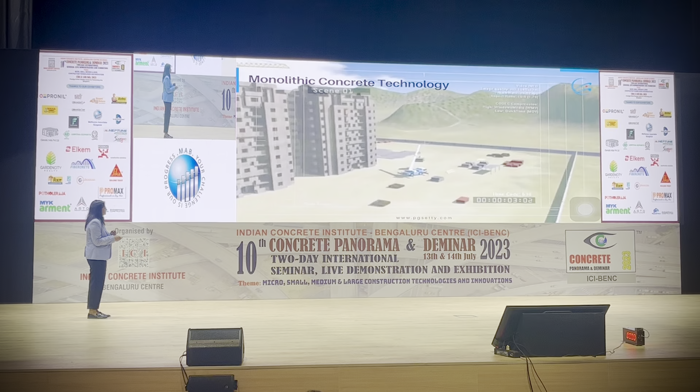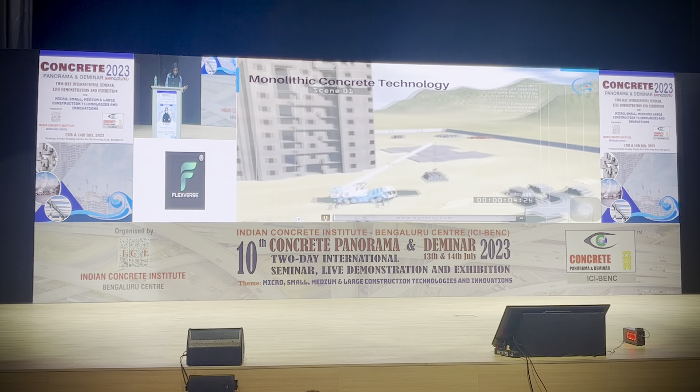So you can do a raft or strip footing, and as soon as that is done, at each floor you lay down your welded mesh or rebar, and then you start fixing your formwork. These are the tie rods which hold the formwork together. This is an aluminium formwork system, which is a self-leveling, self-aligning system - I'm sure you've probably seen it abundantly in Bangalore skylines today.

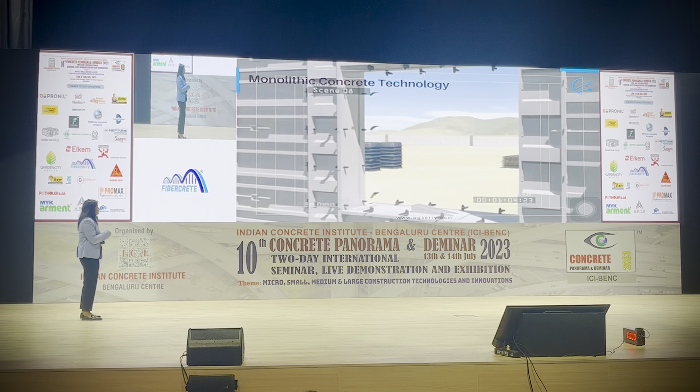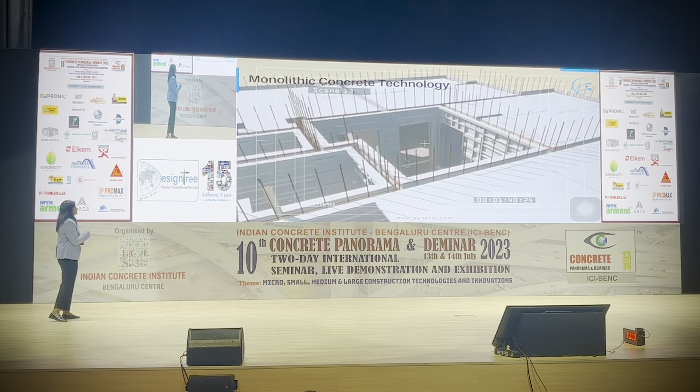All your openings, including doors and windows, will be cut out and left, and the openings will be made. Then ties are added for your openings so they don't bulge when you concrete, and the slabs and everything will start to be laid down. We usually use a boom placer, and the entire structure - your walls, beams, chajjas, parapets, whatever element is in the structure - will be concreted completely in one go.

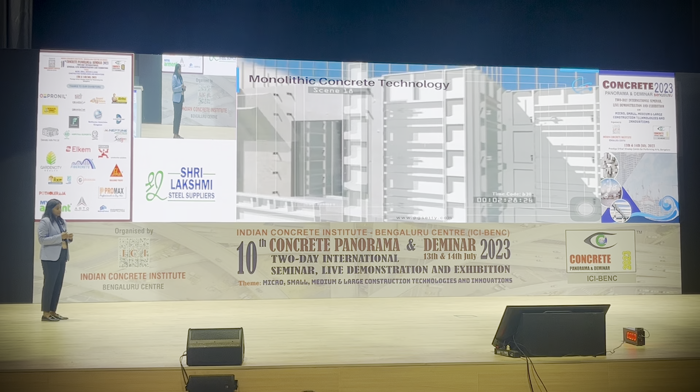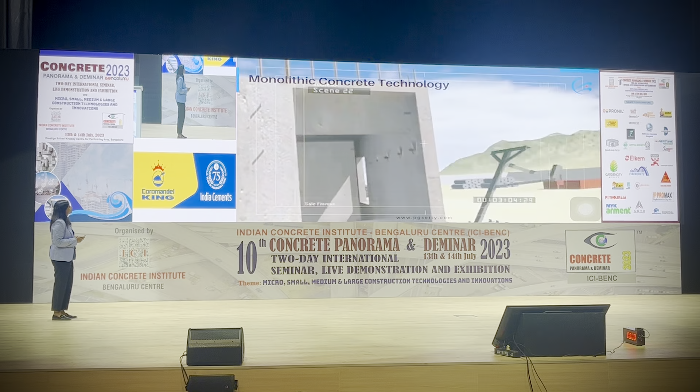This is done with self-compacting concrete. Within 12 hours we also de-shutter the walls, and the slabs probably in around 16 to 20 hours, with central support in place of course. Then all the tie rods are removed, and we prepare the platform to ensure complete safety of the people working on the next floor ahead. Those black ones are the tie rods which hold your system together when you concrete, to keep it in place.

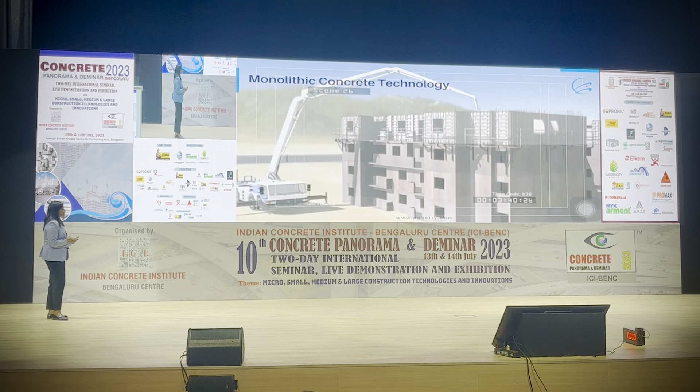We were the first to introduce this to the government agency and show them that the entire house, including wall, slab and all the elements, could be cast in one go. Until then everyone was casting the wall separately and then the slab and then probably the other elements. So we were the first to do a single pour for the entire structure.

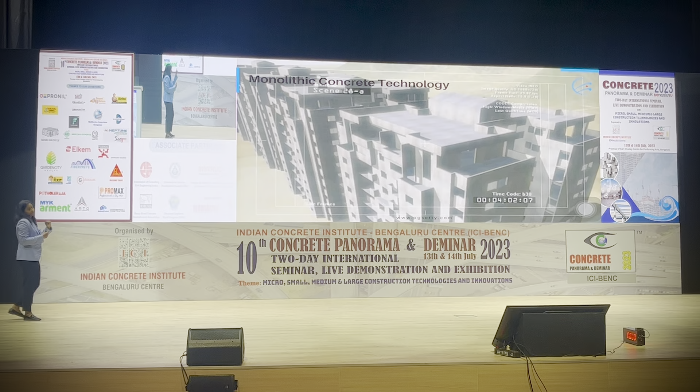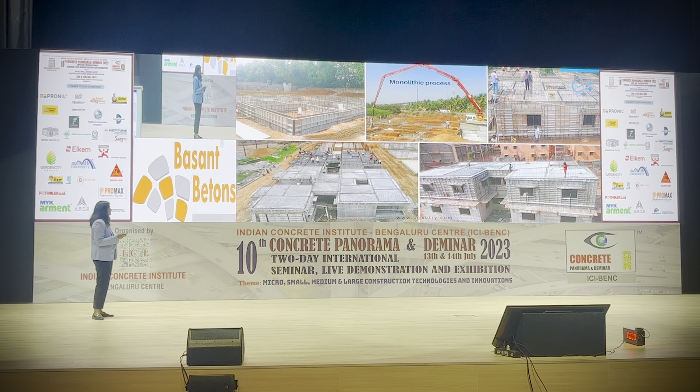So this is our initial days where a lot of mass housing was done, nearly 3,000 houses for different government agencies, including the foundations done in a monolithic strip wall footing system using aluminium formwork. You can see we have a row of houses, every floor plate around 2,000 square foot of 4 houses, and each plate of 4 houses was being concreted every 48 hours. That is the kind of speed we could achieve in this project, way back in 2011-12.

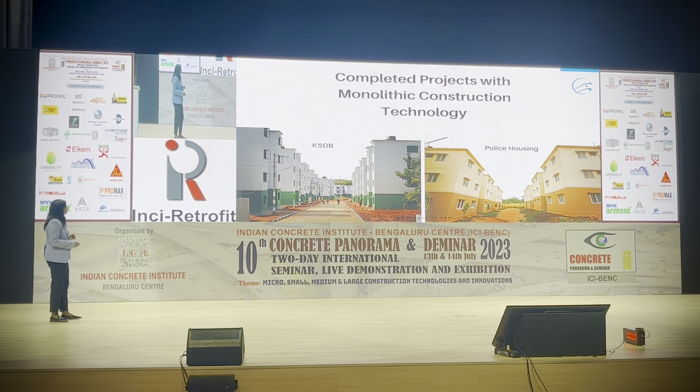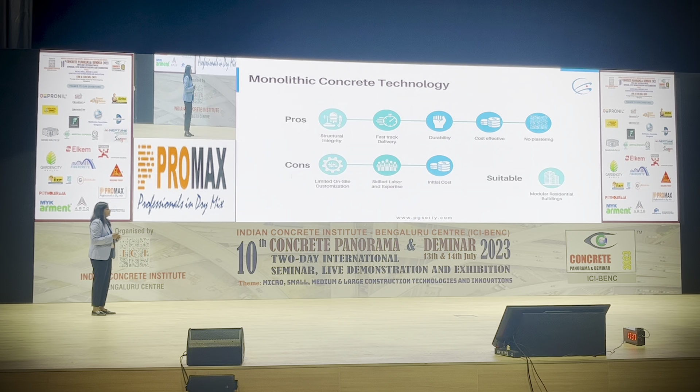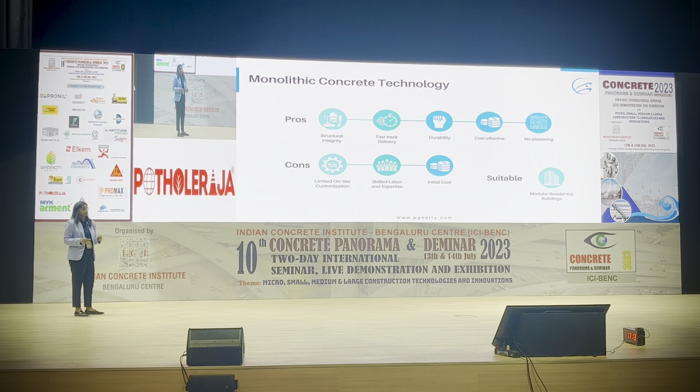We've heard enough advantages of technologies, especially precast and monolithic in some way. The only difference between monolithic and precast is that the entire unit is cast at site with self-compacting concrete, whereas in precast it's completely manufactured at factory and assembled at site. So of course your time and cost are effective, and plastering, the most time-consuming activity which involves a lot of wastage in construction, is completely avoided.

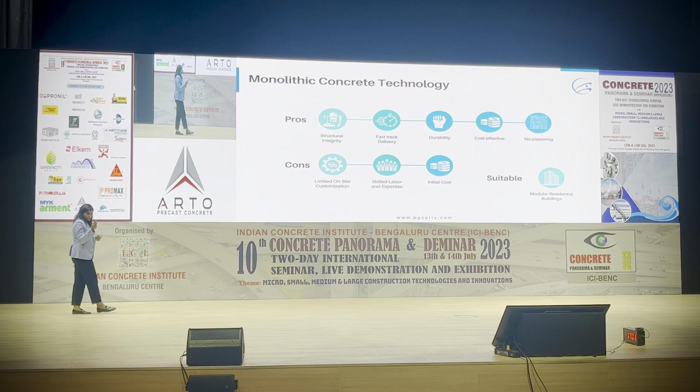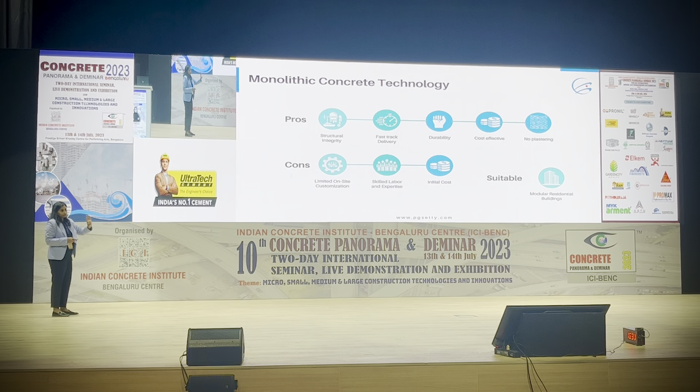With every technology there are some limitations we need to work with, and if you're able to choose the right technology for the right project, you should be able to overcome these cons. There is some limited on-site customization possible, but if you design it well ahead, those things can be thought of. Monolithic especially needs a little bit of skilled labor which we need to train, and initial cost compared to conventional construction would be a little high. This technology is mostly suitable for shear wall structures, usually in modular residential buildings.

Like I said, we were the first to demonstrate for a slum board in 2010, where we could cast the entire structure in one go, and we were also given the Ministry of Housing's most cost-effective housing technology award.

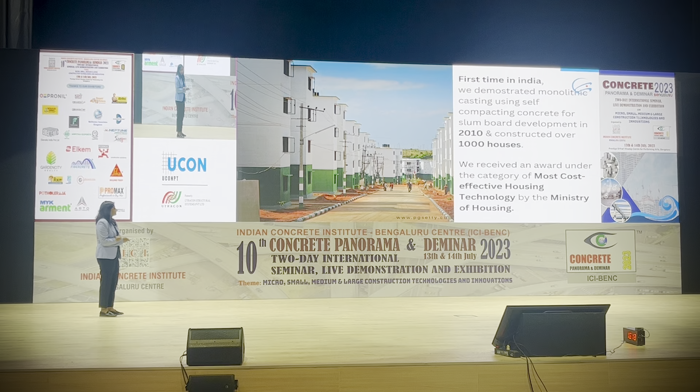So that was one of the technologies that we worked with for nearly 7-8 years, and since 2014 we have also been working on precast. With monolithic, yes, we were good. We were able to match the price after a couple of projects, and we were able to get the speed of the project too, but still we had to deal with transporting concrete, because concrete is a very time-sensitive material, as we all know. We have a time gap by which we have to pour it and put it in the final shape.

The more remote the place, the more problems were cropping up, ensuring the weather doesn't affect production and that I consistently get what I got in the first pour. The surface finish was becoming a little difficult the further out we went, and the more the distance from where the concrete was produced increased. So when we started exploring what other technology we could move to, that's when we got onto precast, studied it, and started using it.

I'll also run a video for you so that you understand the process that we follow.

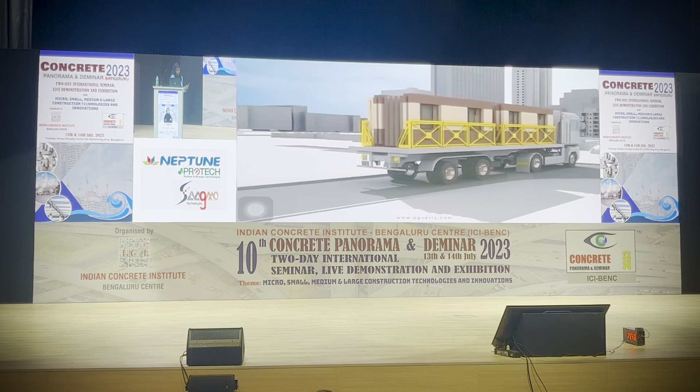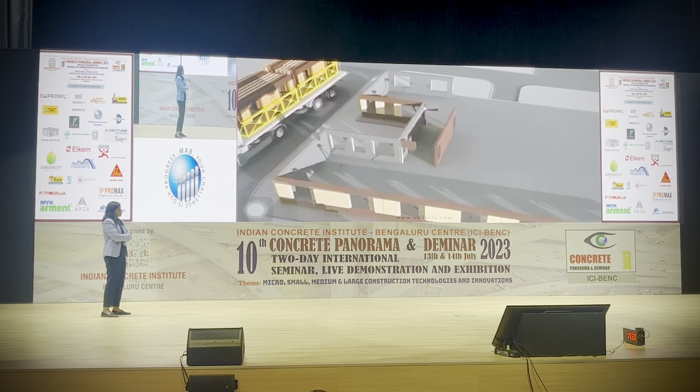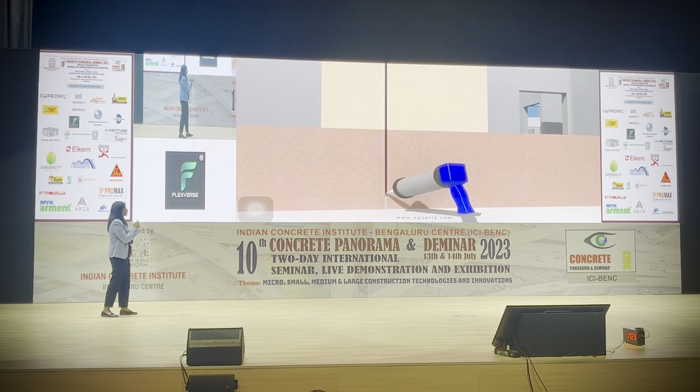So yes, in precast, like I said, all your elements will be manufactured in a factory, transported to site, and then erected. This needs heavy machinery, of course, when you have the volume and speed that you need, and the speed in precast is definitely better than even monolithic construction. These are wall panels being joined, then slab, and all the joints, which I'll show you ahead, will be grouted.

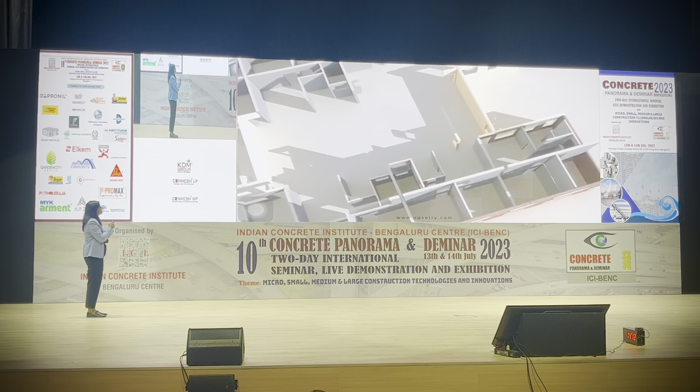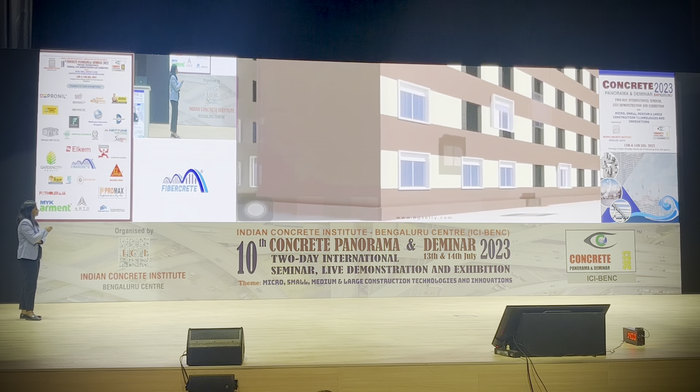As soon as the ground floor is completed, you can immediately start painting and fixing all your openings and joineries. This is one of the projects we did in Mysore recently for Tata Motors, which was not a housing project but a commercial project, completed in 60 days.

This is a setup of the casting yard, where we pour all our precast panels, 2D cast on a plane and then finished. From day 1 when we started production, by day 10 we were already through with ours. Simultaneously, when your foundation is started at the site, your factory activities will also be running. That's where we save time.

These panels are being transported to site, with all the wall panels transported vertically on an A-frame. All kinds of elements, including your frame structure, can also be precast. This structure especially had shear wall, solid precast slab, column beams, and cantilevered slabs.

By day 20, we were already through with the ground floor.

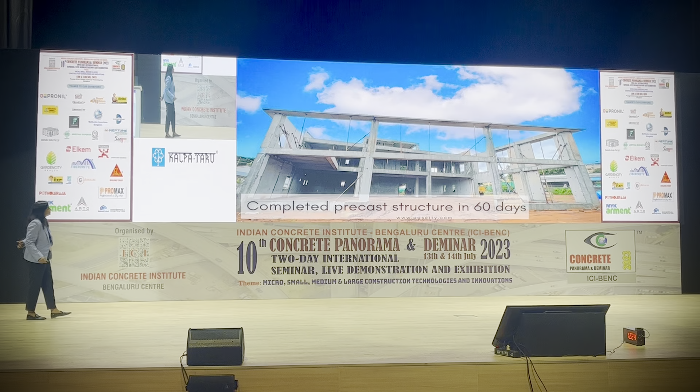So this is the bare shell, which had a combination of frame structure and shear walls.

They took some time for finishes, and this is the end product. This is without plastering, the surface as it is. We also got the Outstanding Commercial Structure Award for this project.

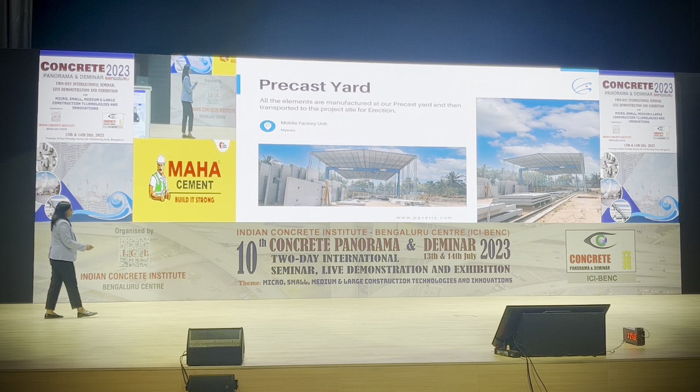So this is a typical stockyard and casting yard that we have, and this is also a mobile, completely knocked-down stocking and casting yard. If there's enough volume, this entire setup can be shifted to any site, let's say 500 to 1,000 houses, if the land is also available. It can be completely shifted and manufactured there, so we bring down the cost of transportation altogether for bigger projects.

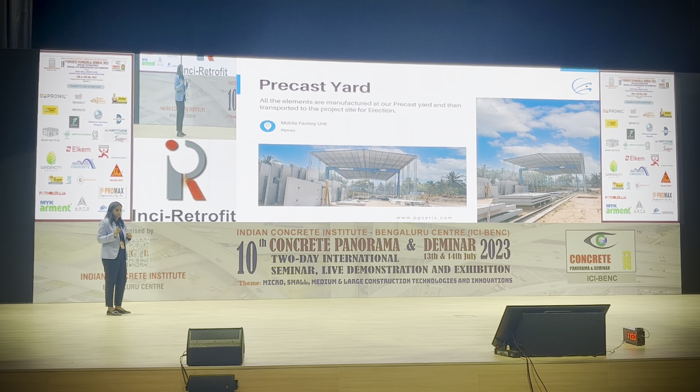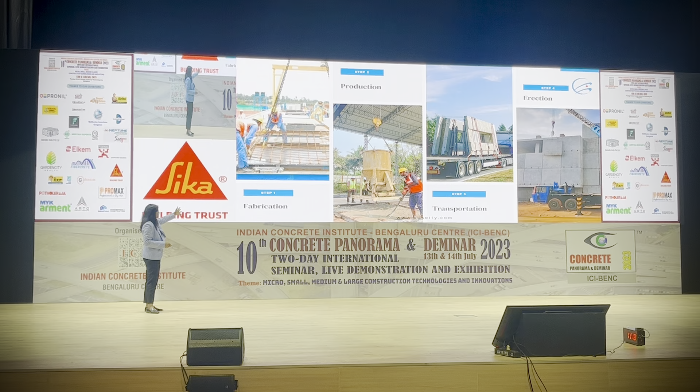So this is a typical stack yard that you see. Like we saw in the video, this is where the start of the work happens, where we lay down your formwork and rebar, and then you start concreting. That's an A-frame trailer I was talking about, where you mount all your vertical panels, your walls basically, which will be transported on an A-frame and then erected at site using a crane.

So typical mold and all the embedments in the mold you can see here. The complete reinforcement, including all your services, plumbing, electrical, whatever embedments need to go into the concrete as per the consultants, will always be embedded and then concreted.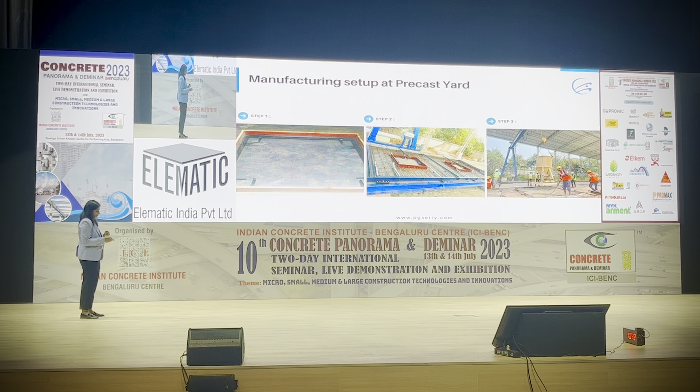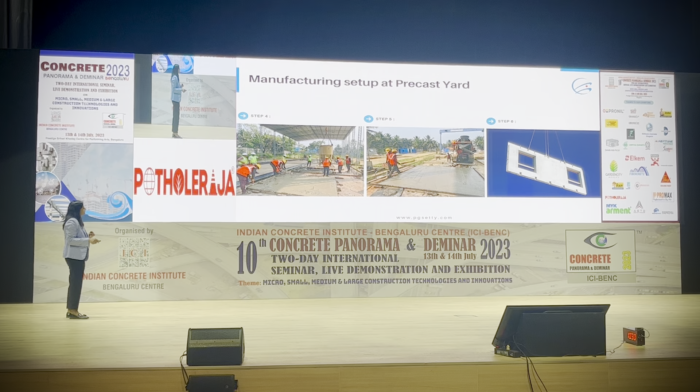Also, you can see those aluminum tubes, those are the grouting tubes which form the connections from every wall from floor to floor. And then we concrete and finish the panel.

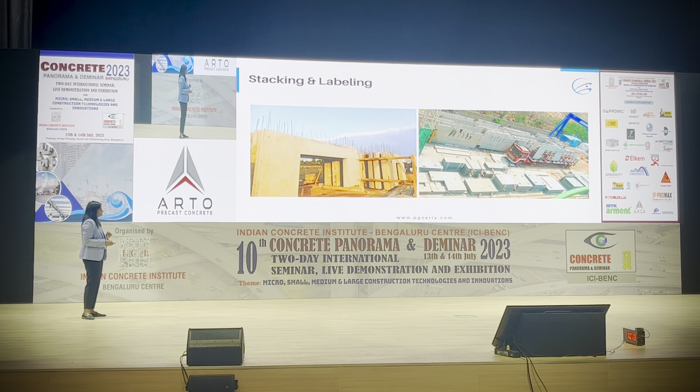This is a typical stack yard. As you can see, the walls and slabs are always transported vertically or horizontally. Every element will be labeled so that in a drawing it goes to the corresponding location that has been designated to it. So this is a stilt-level car park, which is also done in the shear wall system itself.

After you place your entire walls, you can see here this is the foundation from which all your dowel bars are jutting out, at least a meter. These are the dowel bars which form the connection to these walls, which will be grouted later.

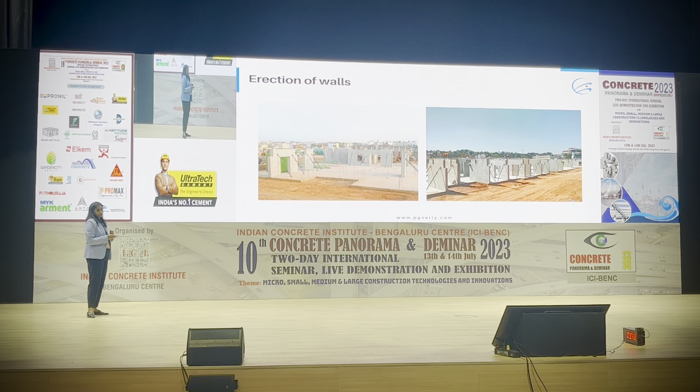Once the slab walls are erected, we have our precast slab which will be erected after that. Precast slabs can be done in many ways: one is the half precast slab system, full precast, and of course the hollow core system that we understood shortly.

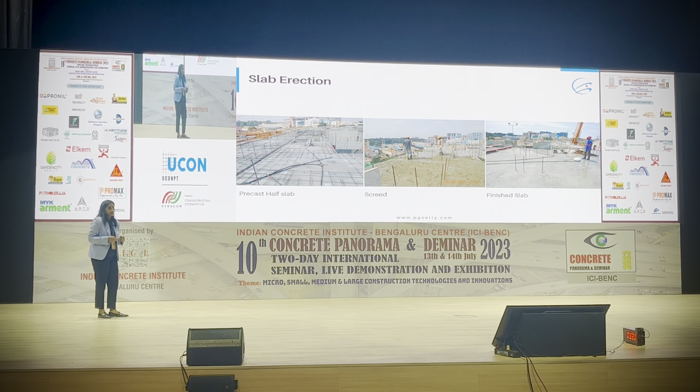So here what we have tried is a half slab system, where half the thickness of the slab will be precast and erected, and all your electrical conduits and top reinforcement will be laid, and then the screeding is done. This was also to ensure, for the Indian scenario, that you do not have a horizontal joint in the entire slab, every slab, and you completely seal with the proper finished screed at site.

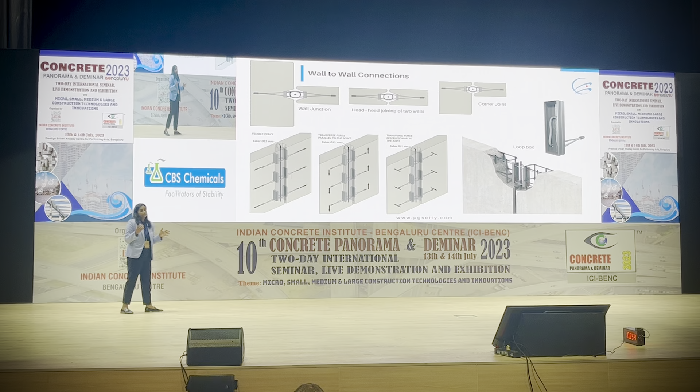So this is a typical wall-to-wall joint that we do. These are called loop boxes. Basically, in 2D precast panels, the different elements come together and get joined, and these joints are designed so that the structure starts behaving monolithically.

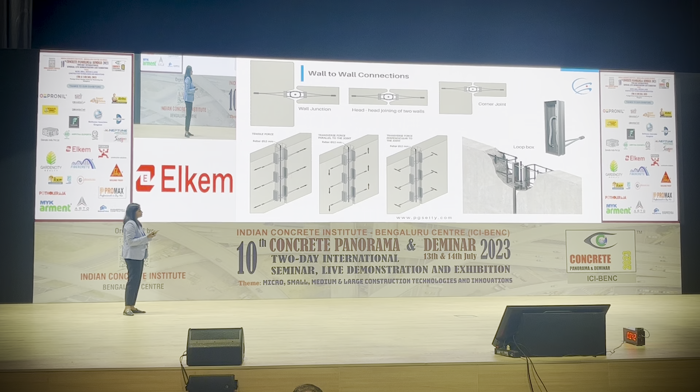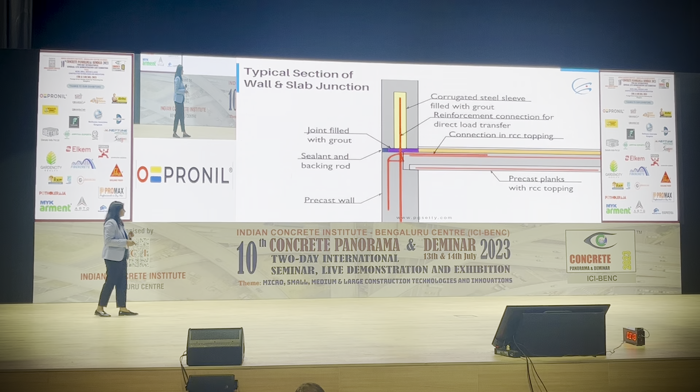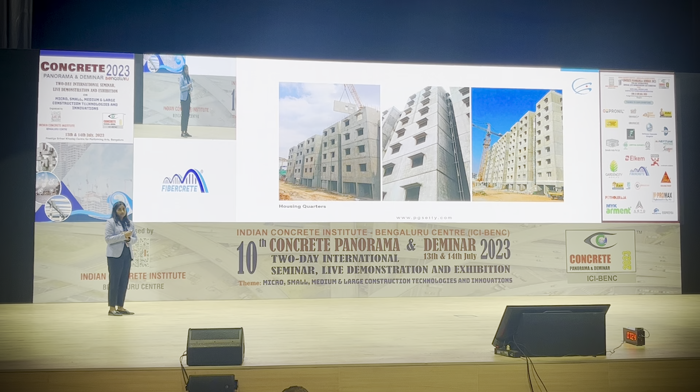And also this is another interesting project we did in collaboration with an Australian company. We started way back in 2012. And here, this was a mix of 2D and 3D precasting. This was done in Bangalore, near Alur for BDA. So here, all the panel elements were casted 2D, like a regular, plane system.

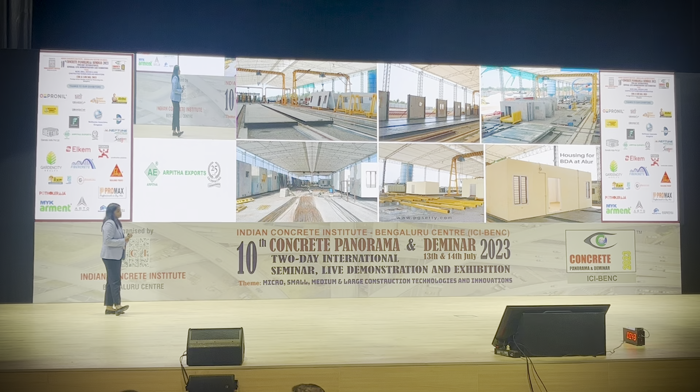And then at the factory itself, they were all fixed to form a cube, completely finished, including your tiling, your windows, your doors, your plumbing fittings, your electrical fittings, your painting, everything finished, each cube. And then transported to site, and then erected at site. All the finish is done, all ready. The only thing left at the site is the welded connections which they had planned for this, for cube to cube to be joined, and the connections of your plumbing and electricals which have to be run through between each units.

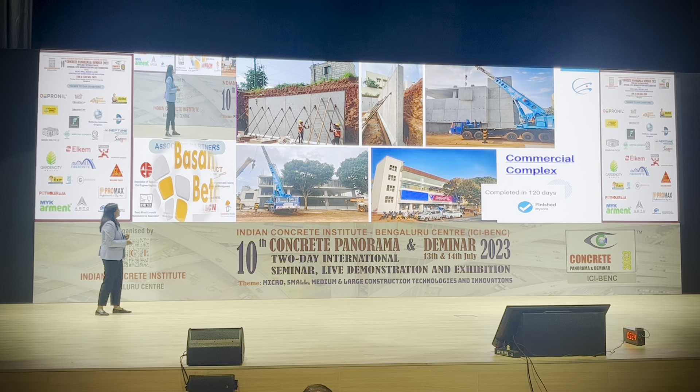So we completely did their retaining wall in 2 days because they had continuous ingress of water, which they were facing quite a lot of problem with. And of course, all the facade walls, like you can see on the other end, and even the lift, the staircase core and the staircases were all precasted.

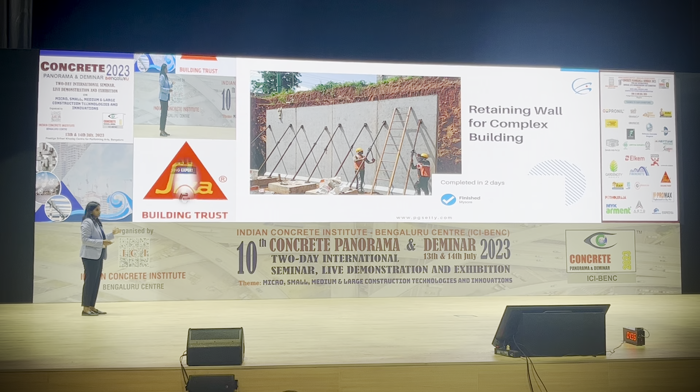So this is a retaining wall that we designed, and in this retaining wall, the only surface we treated, we put a waterproofing, was for the joints, only the joints of the precast. We didn't have to do the waterproofing for the entire surface on the other side. And these, till today, it's been at least last, I think, 7-8 months, have not seen any dampness.

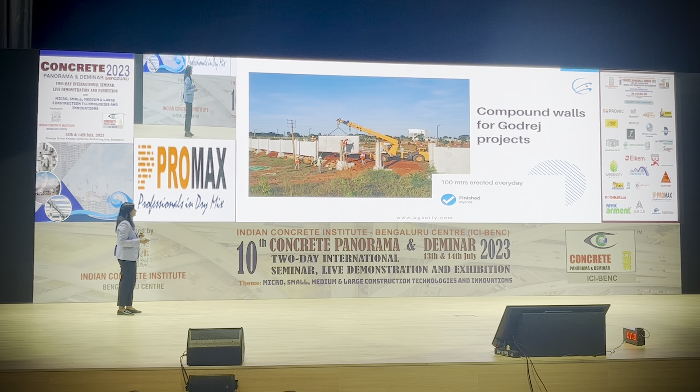These are facade walls, which will be hanged on to your main structure and bolted. So these are single 5-meter element compound walls that we did for Godrej projects in Bangalore. So we were able to do 100 meters every day.

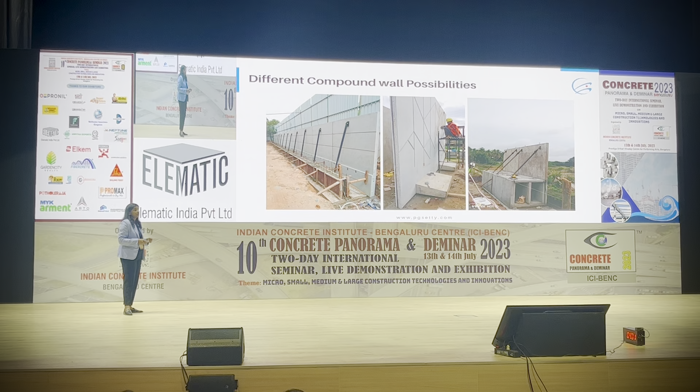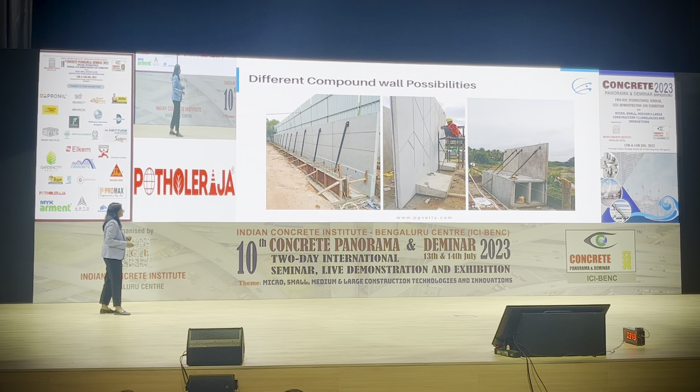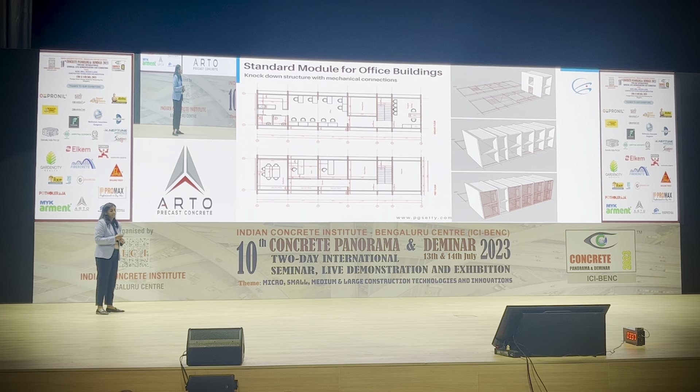And this is a new, I would say, experiment that we're doing. This is for our own office project in Mysore. So we have just come out with a design along with architect and structural designer of modularizing an office building. So like you can see here, we have made modules of.

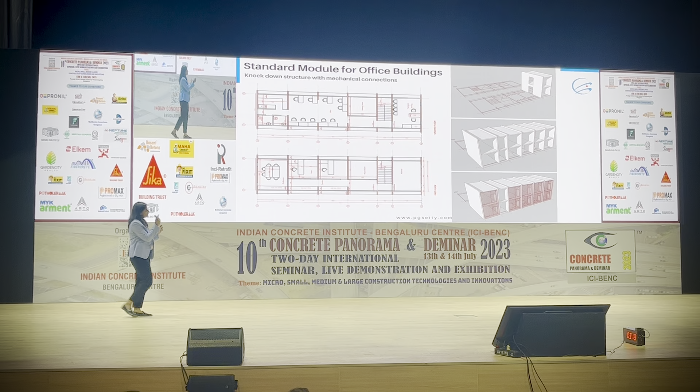Like those white panels what you can see, we have made different modules, a module for a staircase, a module for probably a reception and open area, or a module for a workstation space, a module for a wet area. So we have done different modules. So what this does is it standardizes the module, and your width of your module can be changed as per the requirement of the designer.

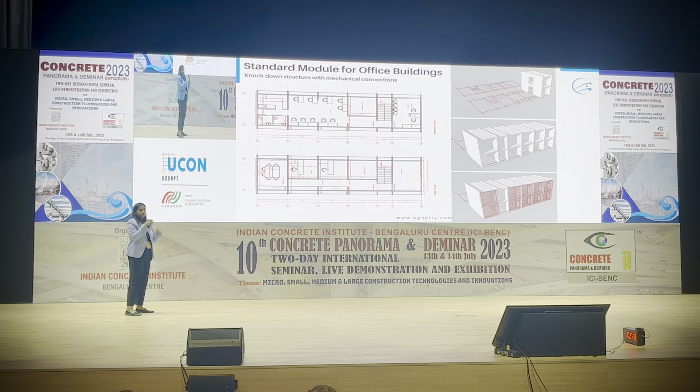And here, all these can be also juggled like a Lego block. You don't want your reception at the entrance, you want the staircase, you just juggle it. Whatever you want to do in the design phase, you just keep moving with because there are standard modules, you just keep moving around with it and you come up with whatever design you want. This is an experiment that we are doing right now, and this is for our own office.

And in this, including complete foundation, we have made it precast. So you excavate, you put your PCC, and from there up, everything is going to be in precast.

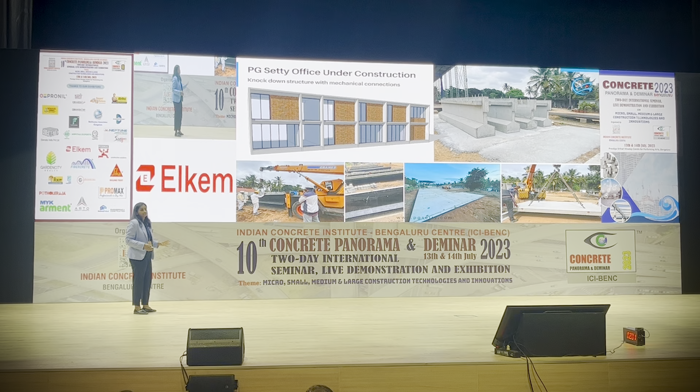So in here also, we went one step ahead, not just precasting the entire structure, we're also making it knocked down. When I say knocked down, this is our office at the stockyard now. And if you want to move our factory somewhere, we don't want to leave our office behind. So our entire office is bolted nut connection, completely precast, including your foundation, can go to a different city, different place, get erected, and completely start operating within probably a week or two.

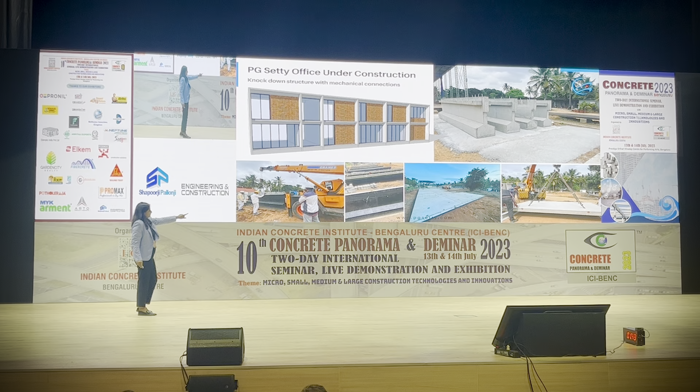So as you can see, these are the foundation elements being erected, and including our grade slab, it's precast, so absolutely no PCC to be done at site.

And all our walls are in precast. In these modules, we've also made sure we give the flexibility of choosing different material on the other axis of the wall. You can make it a full wall, a brick wall, full glazing, half glazing, up to you. We give you modules, you work with what you want.

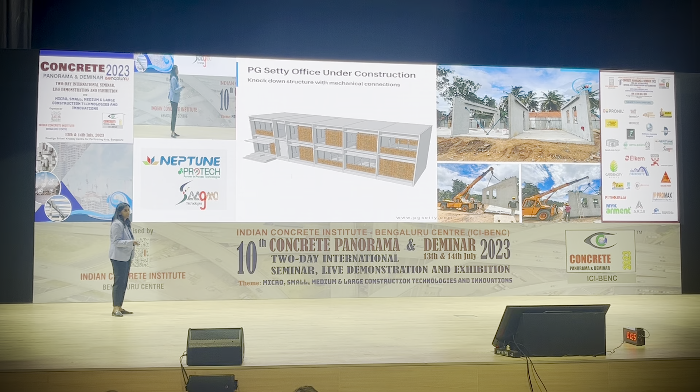So these are the walls being erected. Actually, this is the progress as of yesterday. In these walls, like I said, it's all bolted, nut and bolt connections. At the bottom, you might see small holes all along the wall. Those are the bolt nut connections, which typically look like this.

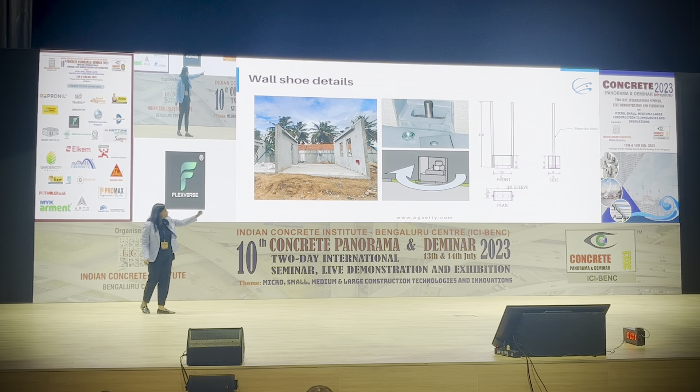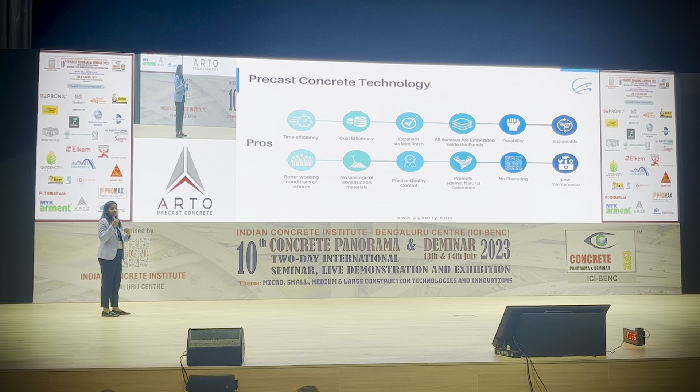So yes, precast, I think we've heard enough of the advantages, and it has already been stressed by all my other speakers. But another 2 points I would like to tell you about would be better working conditions at site. Can you imagine no water at site, no dust at site? The kind of environment is such that even the neighbor wouldn't know there's a construction happening next door. And the kind of wastage we reduce here - absolutely no water for curing, completely chemically cured, no plastering, and like I said, no maintenance.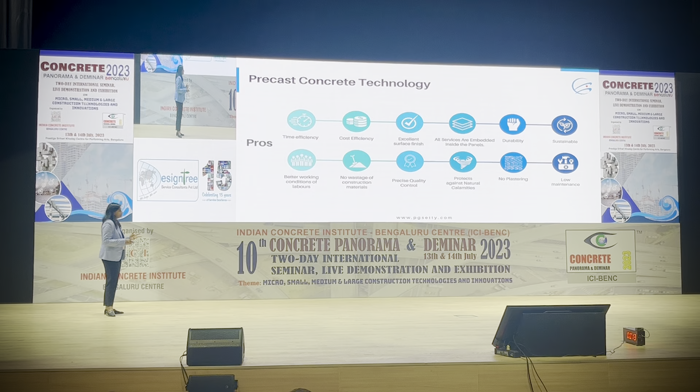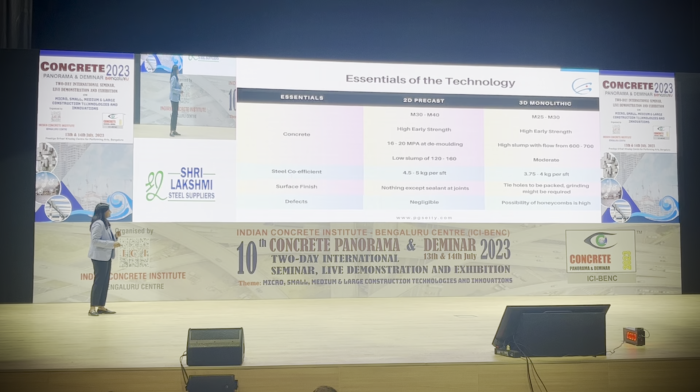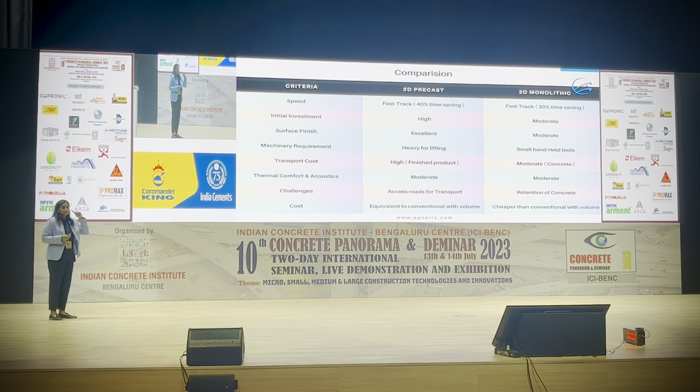So yes, with the technology, there is still that challenge we have. There are different technologies, and we need to be able to select what is right for which solution. So some of the essentials of the technology I could share, and a comparison of both technologies, so that you're able to choose what is right for your project. The moment you have good access, your precast would work. In projects where you can't deliver your concrete to that distance, instead of monolithic, precast would be a better option.

I would love to take your questions, if any.

Thank you, Bhavya, for a very wonderful presentation and the steps you have taken incrementally over the years to make sure technology is not just limited to large cities. It can even come from a place like Mysuru, which people consider to be a very small place, but the latest technology has been presented by your family and has gone all over India. We're very proud of you. Youngsters, do you have any questions for Bhavya?

All are youngsters, in their own way, at least by brain. Sure, on a lighter note, is Somshekhar here? Yes, you are the luckiest, sir. You've got some... No, 25 years we are doing the same job, let me tell you, nobody has replied, can't be replaced. No, 25 years we're doing anchoring, nobody to take over from us. That's what we say - retirement for us, you need to train someone.